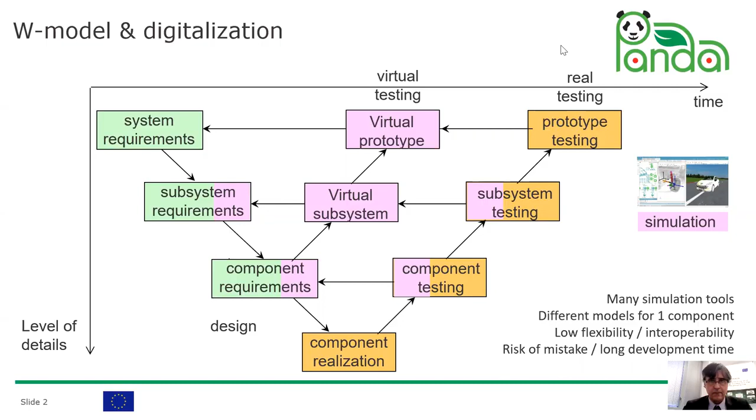That can lead to issues in terms of flexibility and development time. The objective of PANDA is to develop an open access model organization of all the models in some of the tasks of the W model. A cloud of models will enable sharing the models for the different tasks. With that method, we hope we can reduce the time to market by 20%.

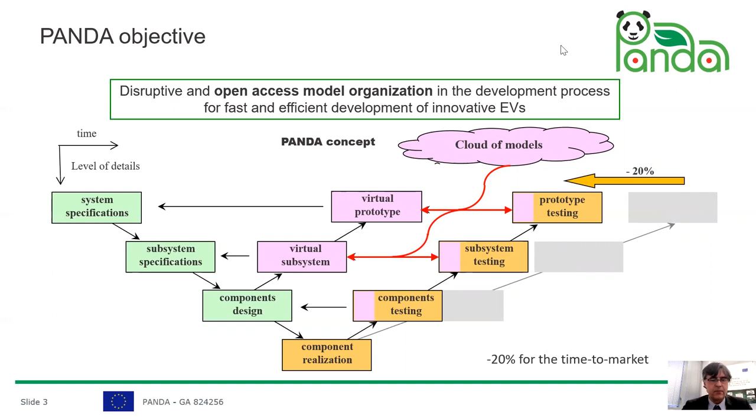The method is disruptive because first we will use simulation based on a functional approach, on the contrary of classical software that are based on a structural approach. That means before the simulation, the user has to pre-solve some conflicts of association between components, but the interest is to reduce the computation time and increase flexibility.

To that aim, we will use EMR, an energetic macroscopic representation, which is a graphical formalism in order to organize models and control of energy conversion systems.

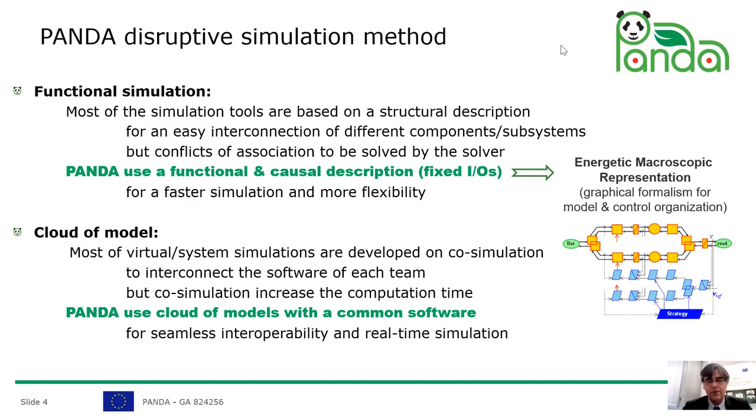The second main point of PANDA is to develop a cloud of models. On the contrary of actual ongoing projects, we would avoid co-simulation of different software and use a common cloud and common software that can lead to seamless interoperability and more real-time simulation capability.

University of Lille brings the EMR formalism to the project. Siemens brings Simcenter Amesim software in order to demonstrate that this method can be integrated into actual software. And we have 3 study cases.

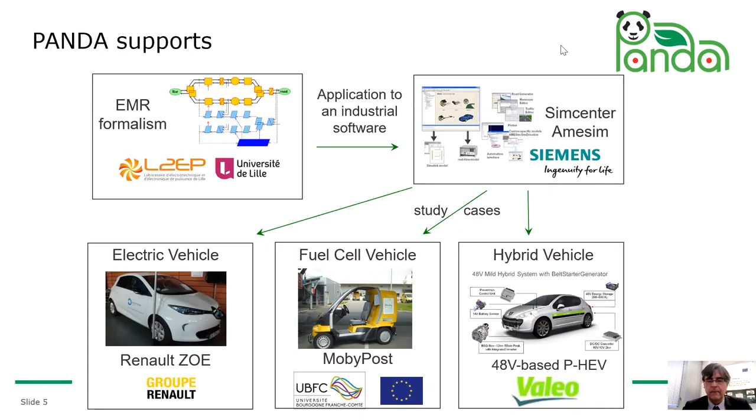A pure electric vehicle or battery electric vehicle from Renault, a fuel cell vehicle from another European project and Université de Bourgogne-Franche-Comté, and hybrid vehicles from Valeo company.

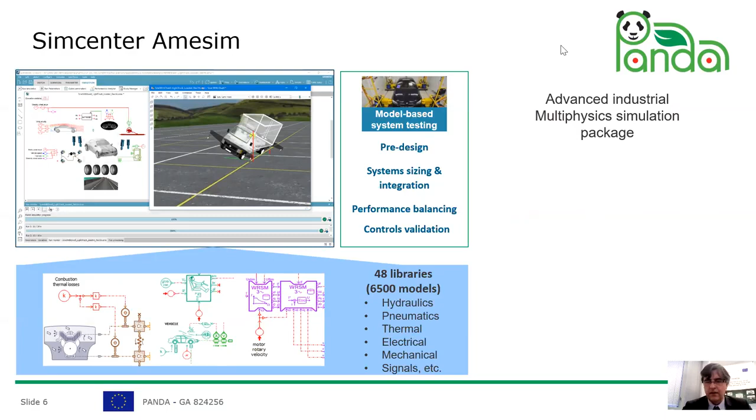The Simcenter Amesim software is a well-known advanced multi-physics industrial software, very used in the automotive sector, and as classical software, they are based on a structural library with different components that can be interconnected as in real life. But in the perspective of PANDA, we have developed a specific functional library based on the EMR philosophy.

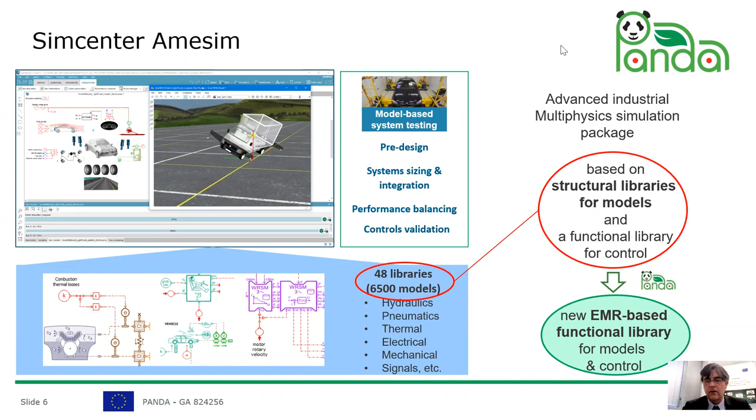For example, with a very simple battery electric vehicle, after the modeling step with equations that represent the different components, we have to use EMR in order to organize all the parts respecting inputs and outputs. The system is arranged, and we can then systematically deduce the control scheme in blue.

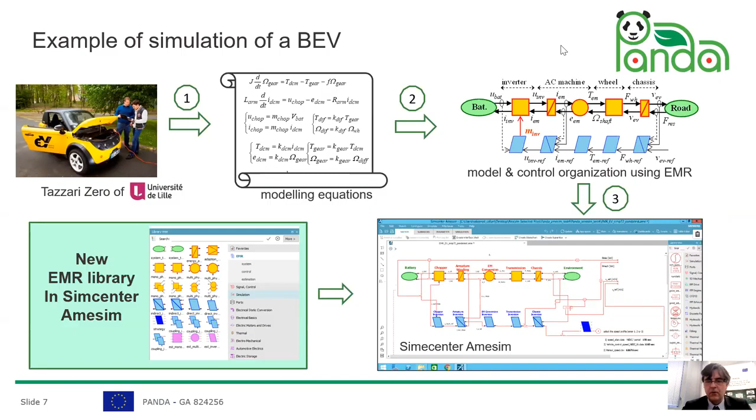Then, thanks to the new library developed by Siemens, we can transpose very easily the system into the simulation package. One of the interests of keeping input and output fixed is that we can change very fastly the different levels of models for the different components.

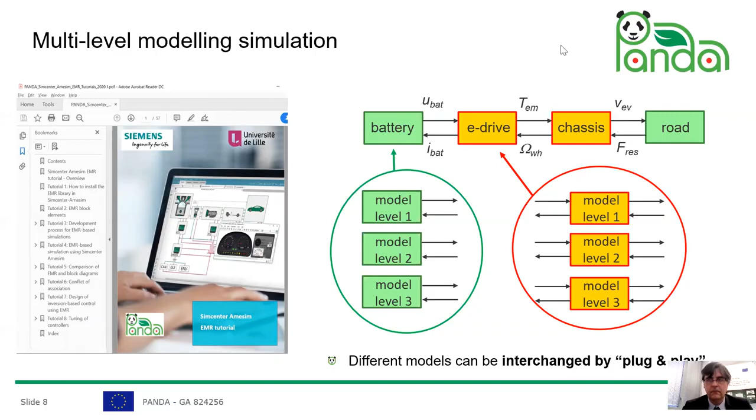For example, we can have a battery with a level of low accuracy, medium accuracy, or high accuracy, which is more complex, and it's the same for the other components. All the components have been developed by the partners and capitalized in the cloud with the library and the software.

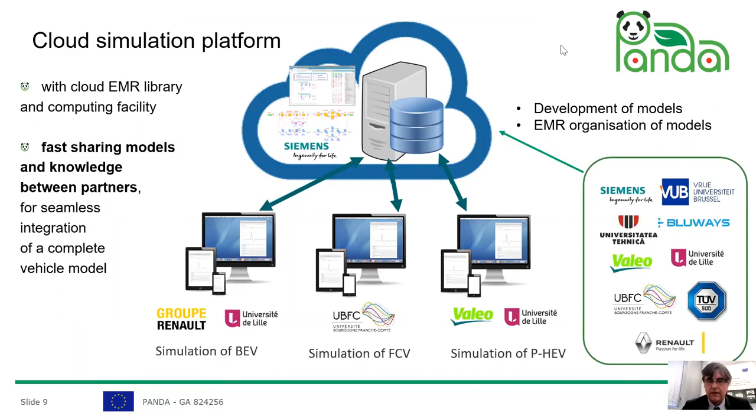And now we are able to simulate the full reference vehicles with the different partners. There are two ways to do simulation. The first is standalone simulation. In that case, the user uploads the simulation file on his own computer and runs the simulation locally.

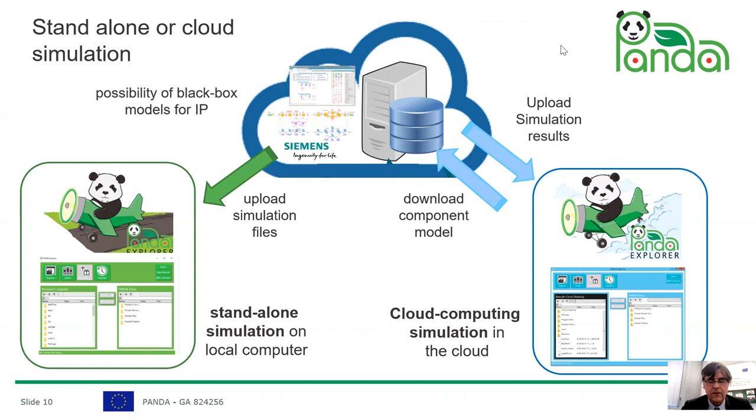In the second way, called cloud computing, the user is connected to the cloud, composes and builds the simulation within the cloud, and runs the simulation in the cloud to get the result. An important thing is that some part of the model will be developed using a black box approach in order to keep the confidentiality of some new innovative components.

The three reference vehicles have been simulated using that methodology. I will now present the result of the studied battery electric vehicle, which is the Renault Zoe.

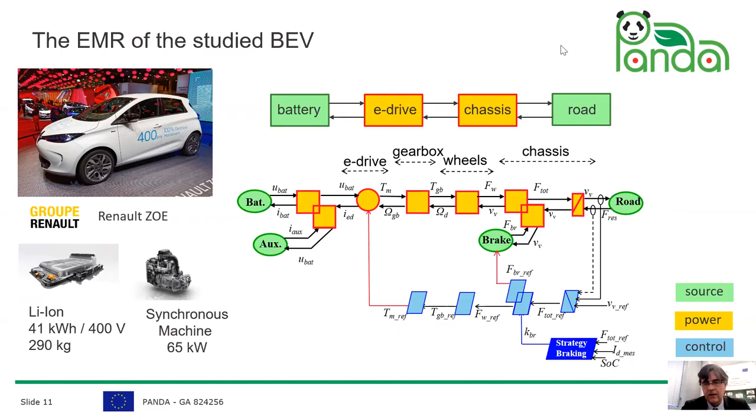Thanks to the developed library, we can build different levels of systems. For example, in this slide, you can see that we have a more complex system, a more complex model, for the electrical drive and the chassis.

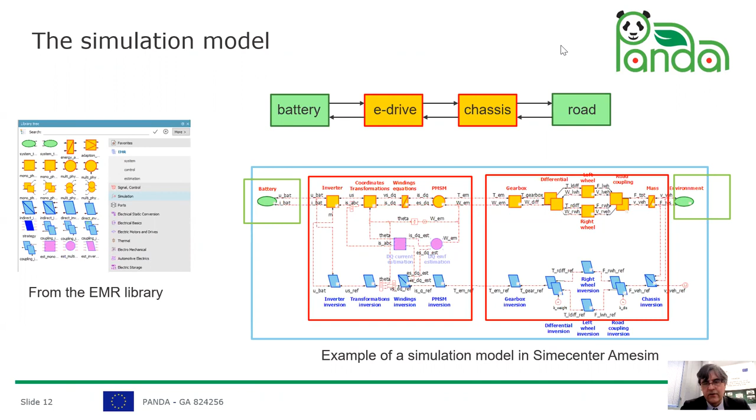For the battery, to give an example, we have developed several levels of model. I will present two. The first one is a pure electric model. The second one is more complex, taking into account thermal effects. All the parameters of this model have been identified by the Vrije University of Brussels.

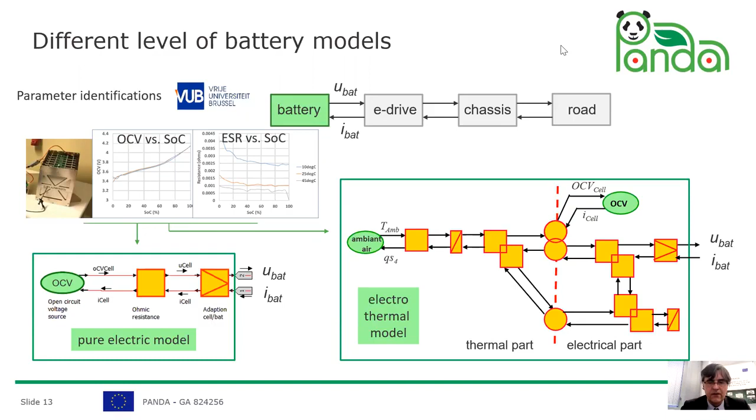We do the same with the electrical drive. I'll present two models: a very simple one with a static efficiency map developed by Renault, and a more complex dynamical model, including saturation effects, developed by the University of Cluj-Napoca. But in all cases, the inputs and outputs are strictly the same for both models, which means we can easily replace one model with another.

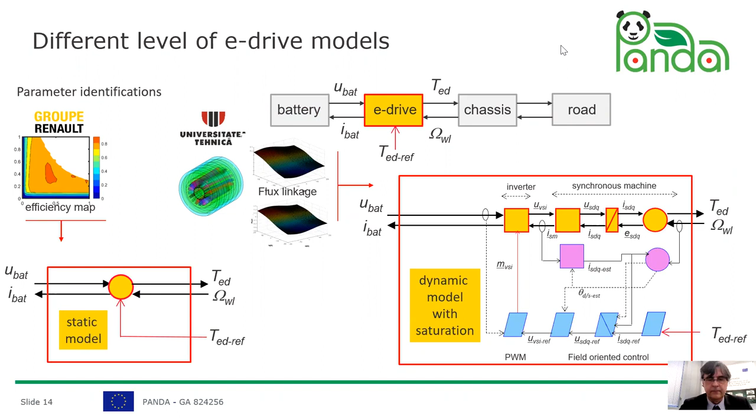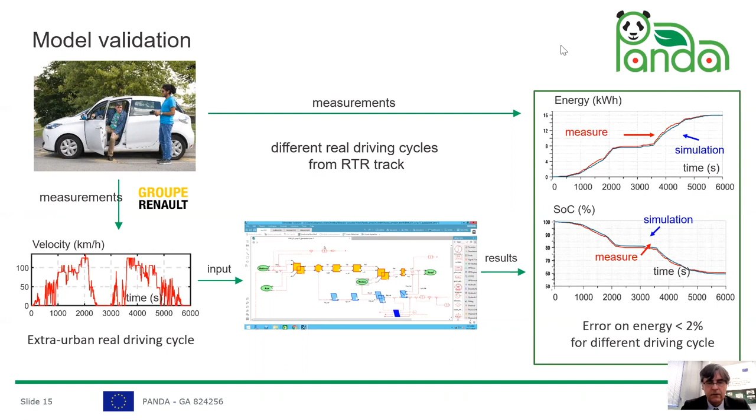All these models have been validated by experimental tests. For the Renault Zoe, Renault performed some real driving cycles. The velocity is used as input, and then we can compare simulation and experimental results. You can see that the results are very close, and in terms of energy consumption and state of charge, the error is lower than 2% for any driving cycle we studied.

Another interesting fact is that we compared a classical simulation using a structural library, since Simcenter Amesim is a structural software, with the new functional-based library. For the same model, the same control, and the same accuracy, we achieved a reduction in computation time of 15% for the functional library.

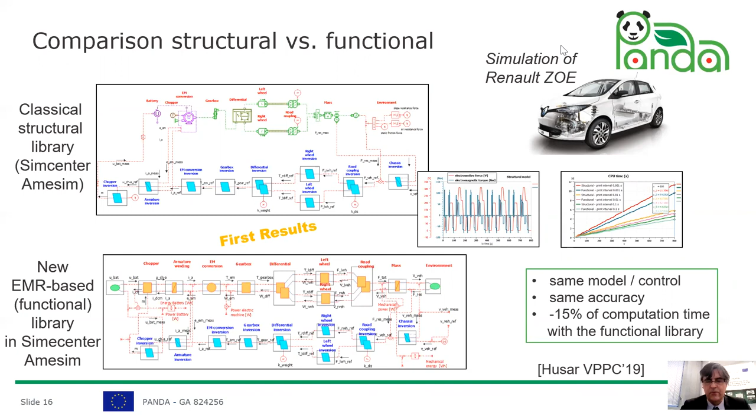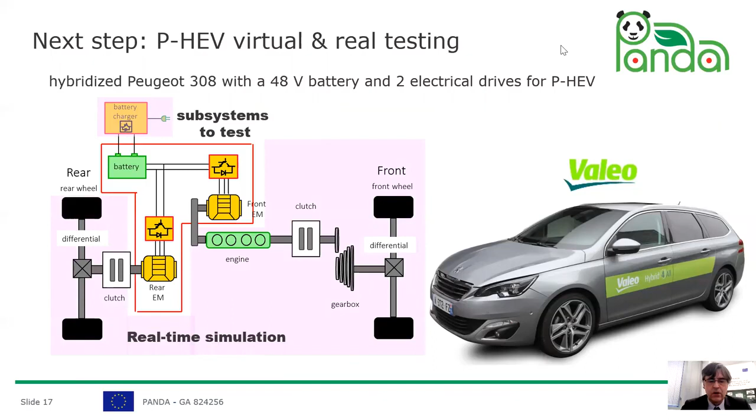The next step is to use the cloud of models to realize hardware-in-the-loop testing. We will consider the plug-in hybrid vehicle from Valeo in order to test the electrical part with interaction with the other parts simulated in real time.

As an example, I will consider the testing of the battery developed by Bluways. It is interconnected with a power interface and real-time simulator developed by Typhoon, which is connected to the cloud.

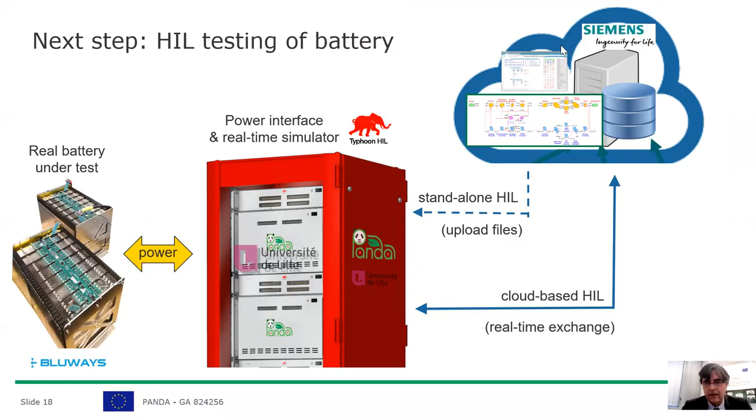There are two ways to proceed. The first is to upload the file from the cloud and do the testing locally. The second is to split the simulation model between the power interface and the cloud, in order to have cloud-based hardware-in-the-loop with real-time exchange of data.

So to conclude, we can say that we have successfully realized a cloud of models using a unified method, and this cloud has been used to simulate the three reference vehicles.

Nowadays, we are working on using the cloud for hardware-in-the-loop testing of plug-in hybrid electric vehicles, and we have to estimate the reduction in time to market thanks to this method. Moreover, we are estimating the CO2 equivalent emissions due to the project, from traveling, the tests, and so on, and we will develop some mitigation actions.